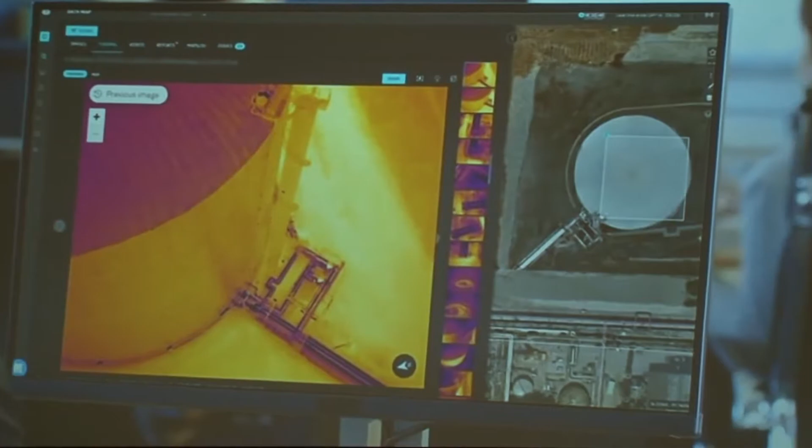Instead of sending somebody out on icy ladders or putting them up in man lifts or those sorts of things, let's go ahead and have a robot do it. It also creates value for us in that the people that used to have to do that are now freed up to do higher value activities.

Anyone in any location can watch the missions. The stakeholders themselves can see those changes and see the different reports and know that it's correct every time. Increase our reliability and continue to keep our bills as low as possible. It just gets people connected to the important information to help make right decisions and to keep people safe. And the quality of information is just so much higher than you would ordinarily have.

I see it playing a huge part in the future. We're already addicted to it. Oh man, it's going to be a pretty awesome ride, you know. It's not just a dream. It's actually, the tool can come in and can actually help us add value day one.

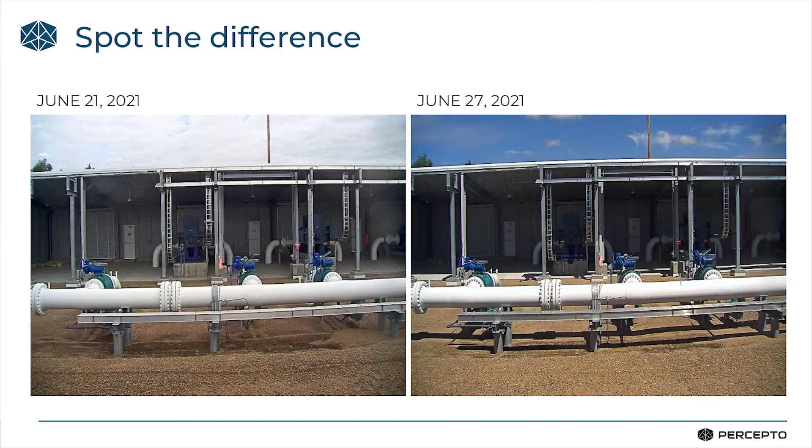What I like about this video is these are not actors. It's the first time it's not actors for me. Real clients. We did cut out all the bad stuff they said about the system. There is bad stuff.

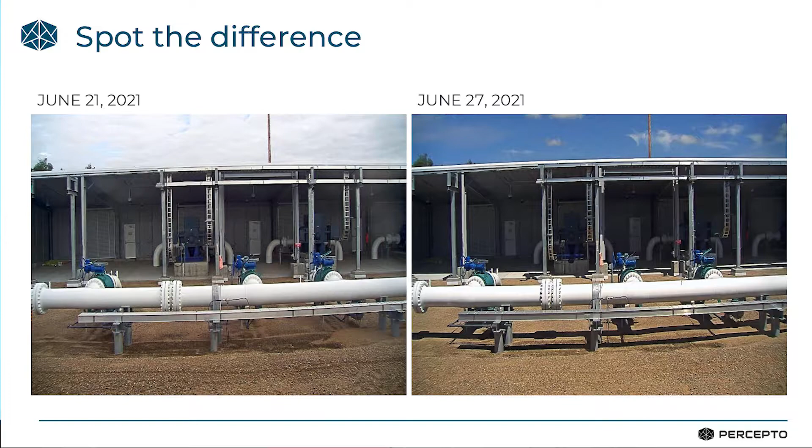But for now, to better understand their pain, we'll start with the drill. Can anyone spot what has changed in this pipeline? A little bit tough.

This may be the start of a leak, and leaks tend to grow to a failure in infrastructure.

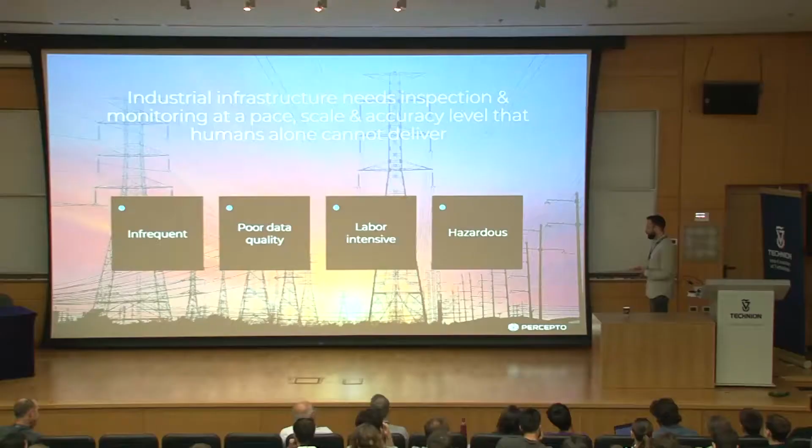To better explain the problem, we are so reliant today on our infrastructure that any fault causing a break in service has tremendous influence on our lives, our businesses, our facilities, and still many faults happen. Why is that? Because we scaled our infrastructure so much without the right tools to monitor it.

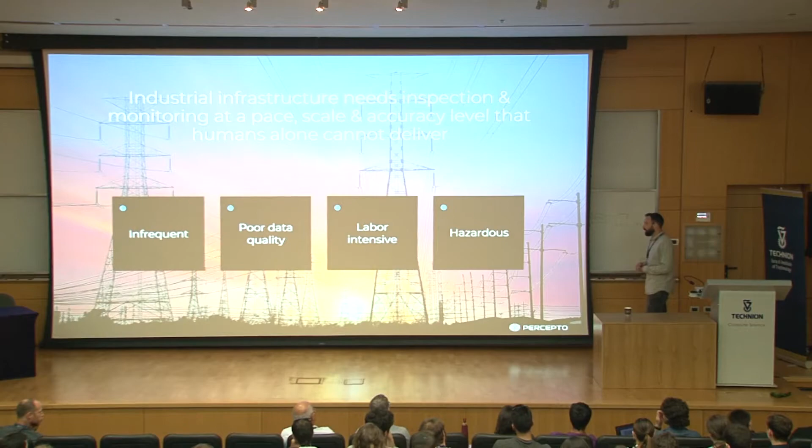Almost all of today's infrastructure inspections are done by human labor, and this is inconsistent, it's infrequent. There's a serious problem getting the right professionals to do that, and in a lot of cases it's also dangerous. And so companies that hold these facilities and infrastructures have no means to monitor their assets, and they tend to react to faults instead of preventing them.

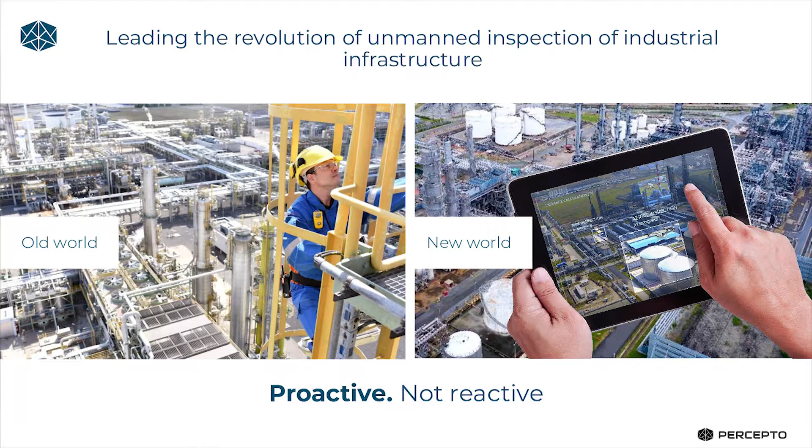What we help these companies do is transform the inspection process from this to this. This is the main screen of our cloud software, which shows potentially all of the issues of your infrastructure on your site. So this is valuable enough as is, but when you power it and make the data collection automatic using autonomous robots, it gets really, really efficient. That's my sales pitch for now.

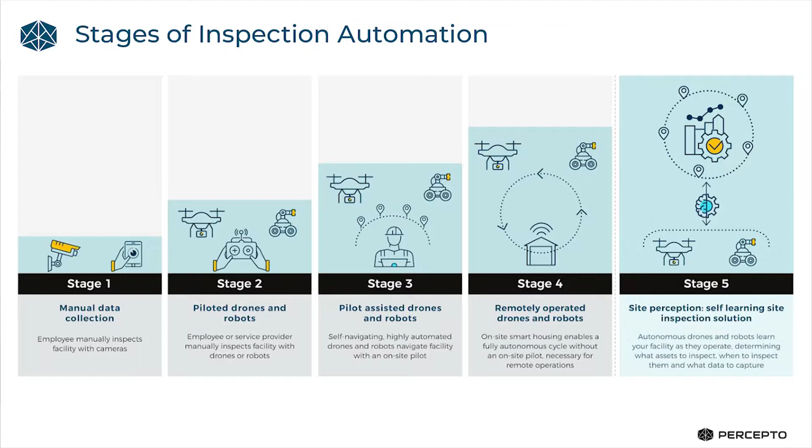So I'm going to talk about what it was like for us to deploy autonomous robots in the field, and I'm going to use this version of stages of autonomy, but I'll dance around it.

So this is how we met the market. Inspection was done by professionals using a notebook in the field, completely unscalable.

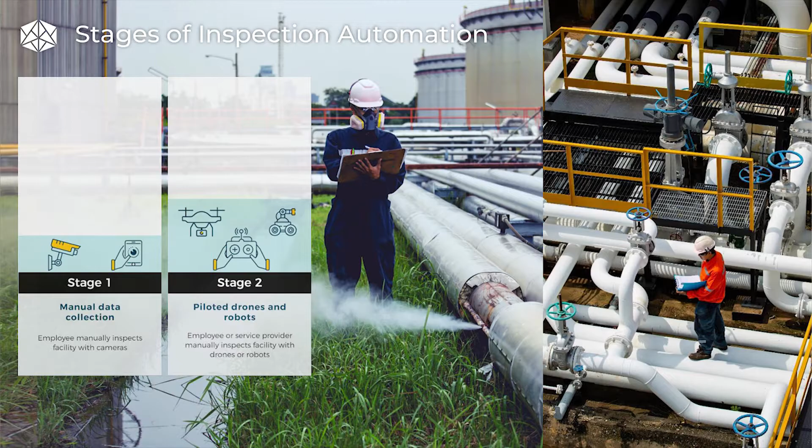As we started, around the time drones became available from an economical point of view, they did start using drones to reach difficult or dangerous places for inspection. However, while they reduced the amount of professional inspectors needed to inspect infrastructure at scale, they added a demand for expert pilots, which proved completely unscalable.

This also improved the data, and we've seen this when drone technology advanced and DJI drones became more popular, because they held some assistant piloting functions.

I'm sure you all know right now, if you buy a DJI drone, you can completely program it to do its mission, and all you have to do is get it out of your car, turn it on, and hit launch. And if everything is okay, it will do its mission, collect its data, or whatever you want it to do, and return and land nearby.

So that's what these companies did, and it did help a little bit with the demand for expert pilots because it lowered the barrier for piloting. But still, it was unscalable because you have to have a certified pilot on the field to mitigate the unexpected.

And for ground robots, while piloting is less challenging, the environment is much more challenging. Navigation is much more challenging on the ground than in the air. GPS is not enough—half a meter of error means you're either on the stage or off the stage. It's critical for an inspection mission.

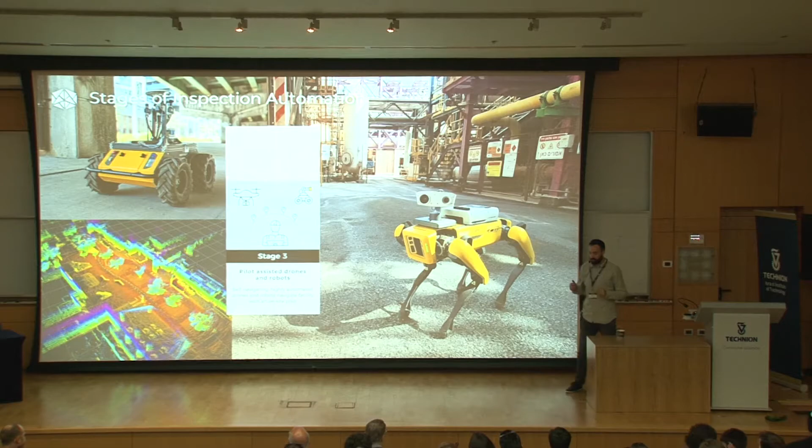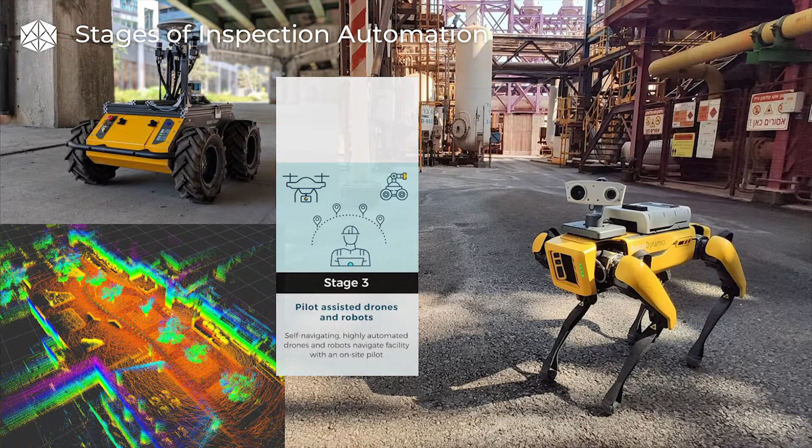So what we need for solving the automated navigation of ground robots is something better than GPS. Most companies use some kind of LiDAR sensor, which is still very expensive and unapproachable. Others use visual markers combined with computer vision algorithms such as SLAM to navigate. But this is still considered an unsolved problem, since again, even if you're at 99%, if you need an operator once or twice a day to come rescue the autonomous robot because it's stranded, then you're not ready for scale.

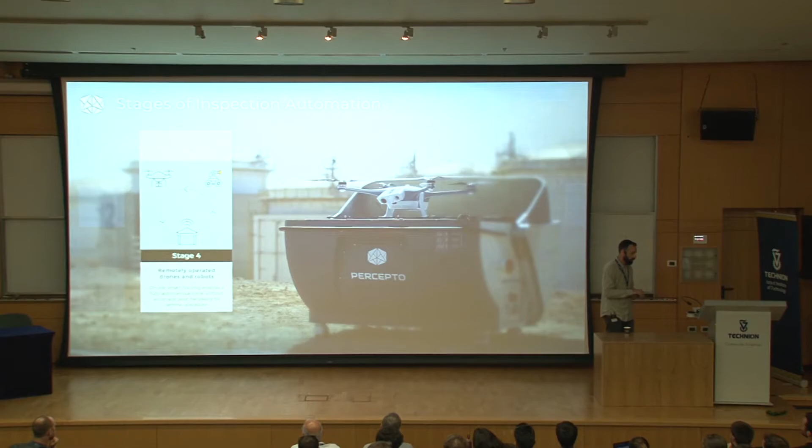So for us, the big announcement for the market was our first drone in the box. Drone in a box means the drone can repeatedly go out, execute missions, come back, land, offload or upload its data, charge, get ready for the next mission, and go again. The target here is to have at least several days without any human intervention.

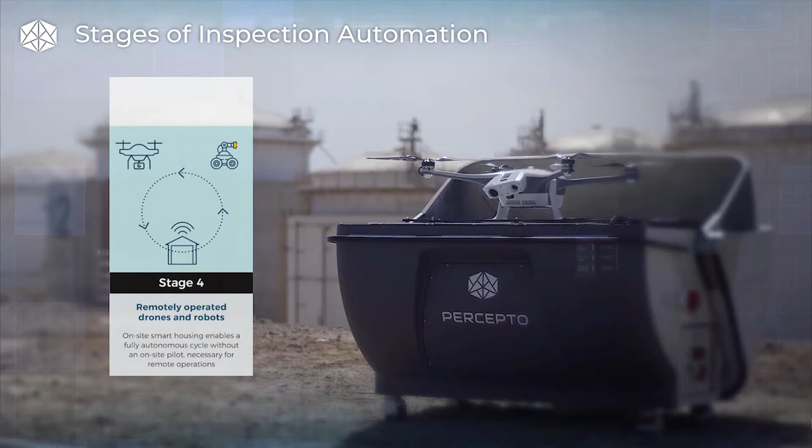So for this to work, the most dominant technology barrier is precision landing. We want to land on a landing pad—for us, it's less than one meter square—and we want to do it night and day, windy, stormy, rainy, whatever.

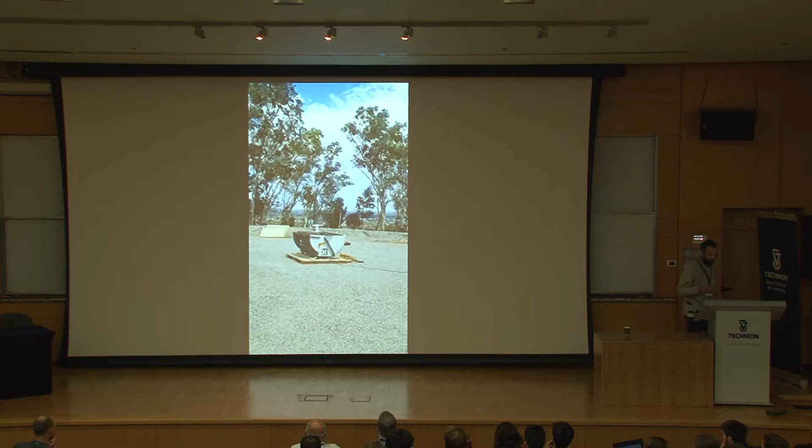So what we did is added markers all over the pad. This is not us.

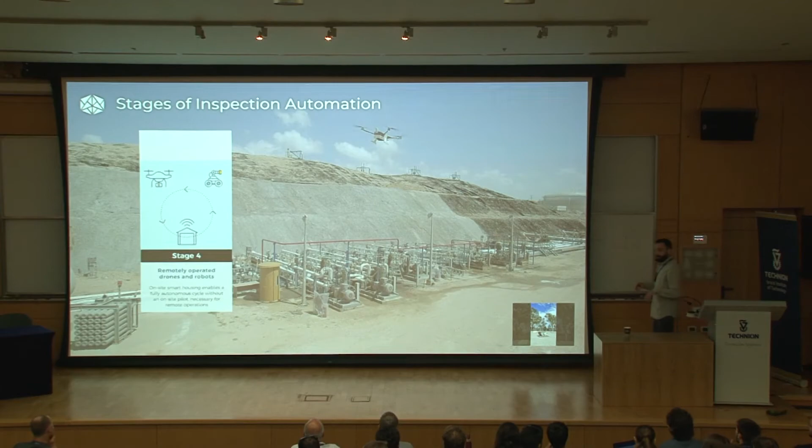For which, if the drone sees only small parts of the pad, it knows how to continue. So, different from solutions based on GPS or IR beacons, if the drone comes close to the pad and then gets a wind gust and is pushed a few centimeters to the right when it's very close, the beacon goes out of the image. So as an example of things we had to develop to make our autonomous cycle stable, we added markers all over the pad, so it only has to see a small part of the pad for the landing to continue, and not start over.

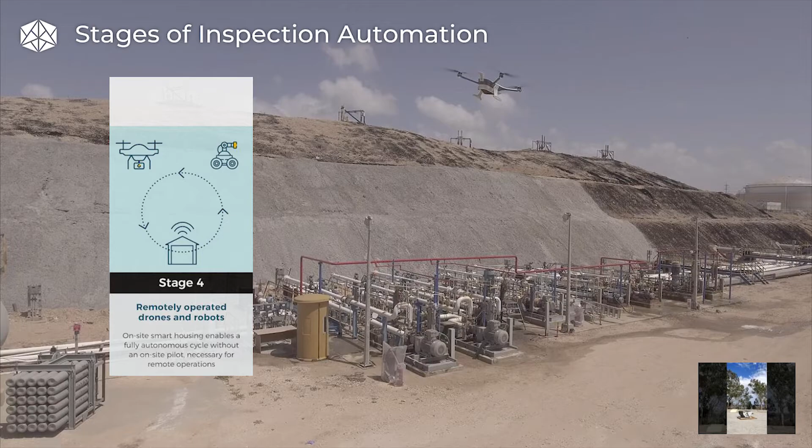Another example is a parachute. This is not me. That's a nice video. Okay. Parachute, right?

So as we accumulated tens of thousands of flight hours and worked out all the kinks, making our solution stable and prolonging the time between required human interventions, still faults can happen. Even if you have a 99.99% solution, faults can happen.

And when we need to deploy machines, autonomous robots on site, like this facility with very sensitive infrastructure, we want to make sure we do no harm. And for that, we had to develop a parachute.

So, another video. Let's try again. Okay, so you've missed the parachute video.

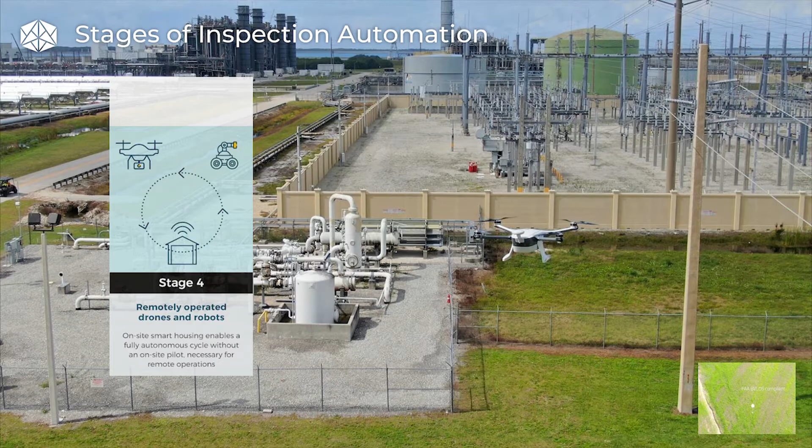We developed the parachute. The parachute's goal is to reduce the impact of the drone. The drone is lost by that point—if one of the engines fails or the battery fails, the drone is lost. Saving the drone is not the goal. The goal is to save the infrastructure below the drone, or any humans, obviously.

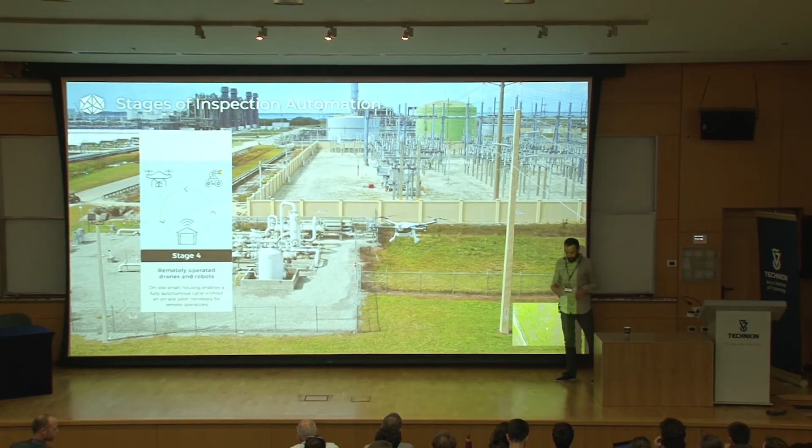By the way, I think this is recorded, but I believe it only happened once for real. It happened many times in testing, of course. And my point is, even though you have a solution that works, you feel like it works, nothing is 100%. You always have to develop more mitigations, more safety layers for the robots, especially if they work in such a hazardous, risky environment, and you have to communicate safety to your clients.

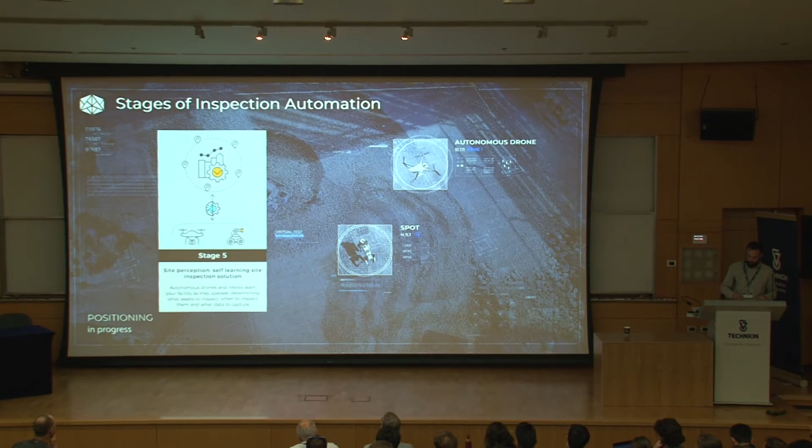Okay, so once we had the fleet of autonomous robots working, with long enough time between human intervention, it was time to get the inspection and monitoring of facilities really autonomous—meaning, in our vision, it's not remotely operated anymore. It just operates without any humans behind it. So that's where Percepto is now, and that's how some sites already work, and we keep developing more features.

Like collaboration between the robots, having the robots learn from what the others see and let them know what to expect when going to inspect, what to expect when inspecting an asset. These are all things we already do, which are not necessary for fully autonomous operation. What is necessary is regulation.

And unfortunately, while Percepto is at stage 5 of autonomous inspection and does so at a few sites, most of the world's regulation is stuck at stage 3 and enforces us to have an on-site certified pilot with line of sight of the drone. So our scale in a lot of geographies is limited by the thing called BVLOS, which is beyond visual line of sight—a certificate from the authorities that we can operate the drone without any pilot present on site.

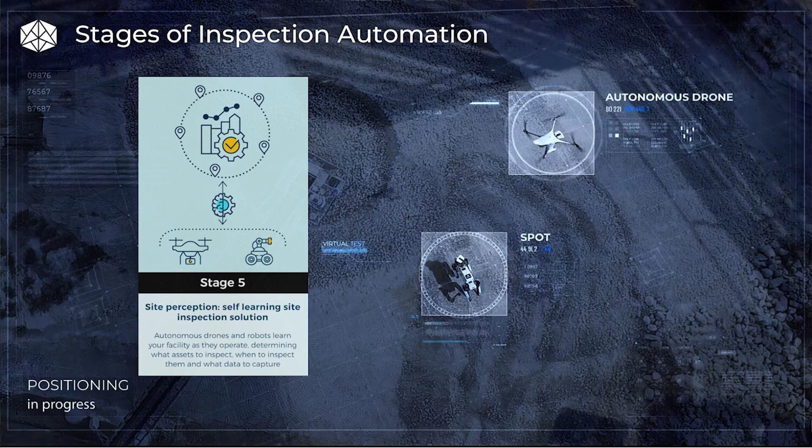Percepto works with all its effort to progress regulation, mostly in the US, where we sit in several federal committees, and we try to influence how autonomous robots' future is going to look like.

And for now, two months ago, FPL, which is Florida Power and Light, announced that they're going to deploy a Percepto system in every electric substation across Florida. That's around 700 systems of autonomous robots. It's a process that's going to take a few years. We're going to solve all the regulation kinks while we do it, now that we have a very strong partner in Florida.

And that's it, I think. If I have time for questions, I'll be happy to hear them.